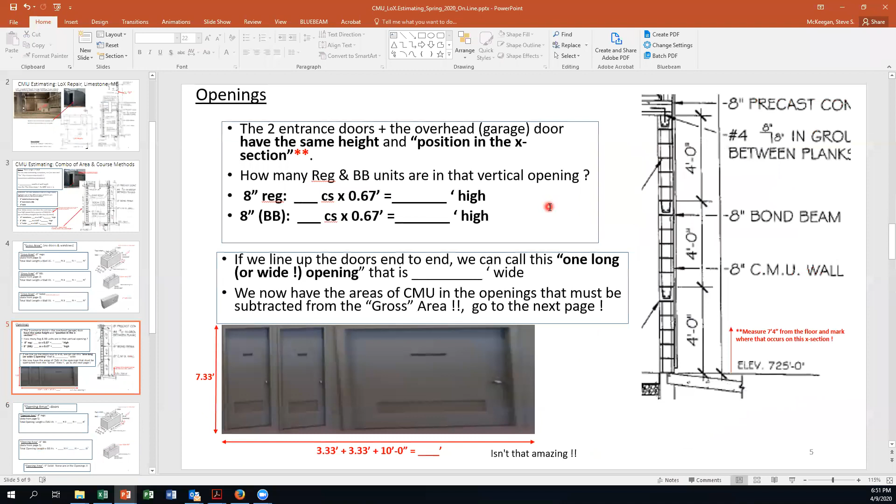And right. And there's a 4-inch solid CMU. Everybody okay on this one? Any questions? Nope.

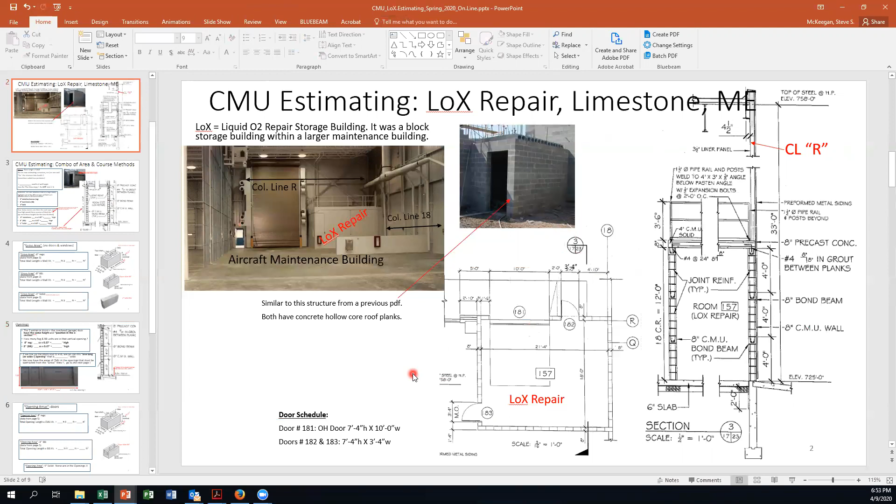Amazing. So we took those doors, 3'4" or 3.33 wide, 10 feet wide. What's that total length, or the total width, as if that were one big door? Okay, that's what you're going to put right there. Now, in other words, I did this part first. So we lined up the doors end to end. We called it one long or wide opening. So this number is this number.

Okay, but we want to say, where does the height of the doors, from the top of the foundation wall, 7'4", where does the top of the door end in this cross section? And you want to use these vertical dimensions. So it's 4 foot from here to here, another 4 foot to here. That's 8 feet total. If I subtract 8 inches, that gives me what? 7'4". So the top of the door is the bottom of this what?

Bond beam. So the bond beam, even though it's an open web bond beam, we're going to make it work. And you'll actually get to play around with these bond beams when you come back and we do the lab part. So the top of the door lines up with the bottom of the bond beam. And so the bond beam is the header. You need horizontal rebar and grout to fill in that void so that it can span over the door opening.

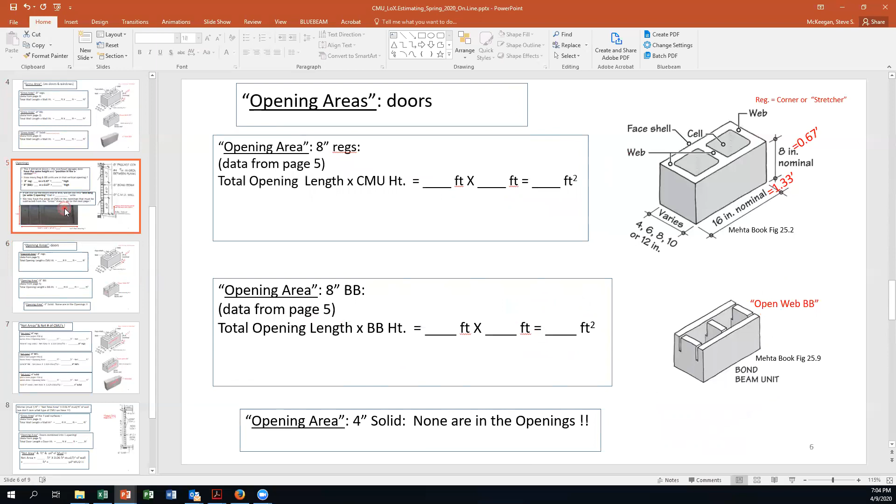If you take the bond beams from page 4, we had the gross area, square footage of wall surface for the bond beams, as if just the bond beams, okay? We subtracted from that number the opening area, the bond beams that were in the doorways, right? There was only one course in the doorway. That's going to give you a net area for the bond beams. Multiply by 1.125. You now have the number of 8-inch bond beams that you need to order.

Net area for the 4-inch solid. Again, data from pages 4 and 6. The gross area of the solid. Now, to be honest with you, the course method would be easier for this one, wouldn't it? It's just one course of 4-inch at the top. And that was another way to do it. I'm going to give you an answer key after this is done, and I'm going to show you both methods. But what we're doing is we're going through the area method for this one. Area method is probably the one that's used the most.

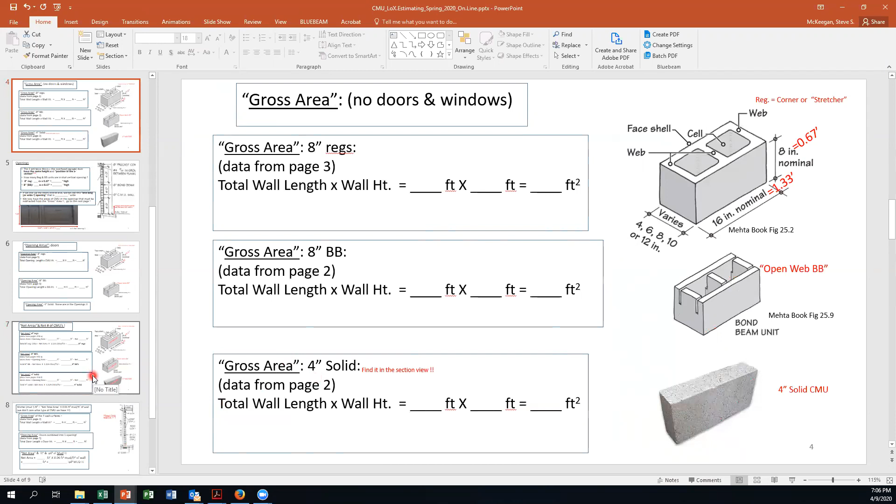There were no 4-inch solids in the opening area.

Whoop, I got some, hey, you guys got to pay attention here. There's somebody waiting. So getting back, where the hell am I here?

It's getting back to here. That was 0. That was from page 6. There's your net area. Multiplied by 1.125 CMU per square foot. That gives you the number of 4-inch solid that you have to buy. So basically, you're going to fill in these blanks.

Oh, no more typing. Only a couple of you did it. I didn't see any collusion, but I did in another course, not your course. And so the rule is you got to do this by hand. You cannot type it. Okay, keeps you honest. Strictly, it's nothing personal. Okay. Is it making a little bit of sense for you? No. What if we're able to like draw on it, like edit the document? No, you got to do everything by hand. You can't type stuff in. Okay, that's just going to be a rule. Do we have to write all this, or can we just write like our formulas? What did I tell you?

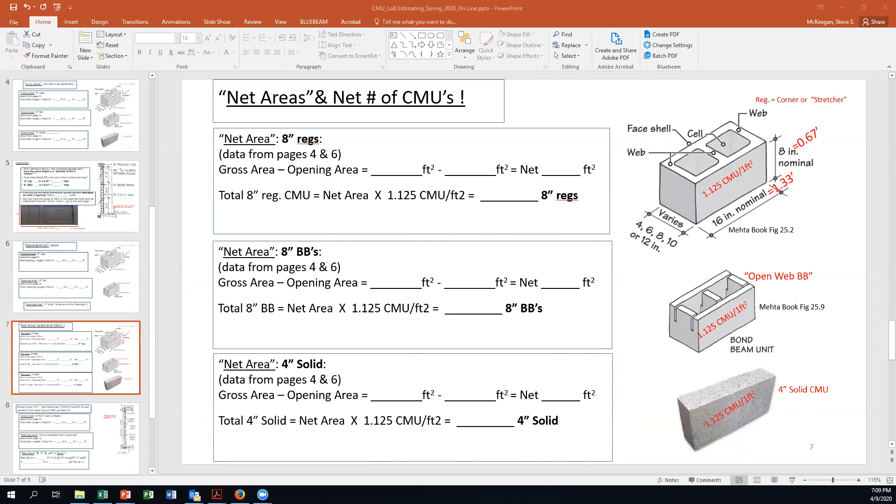So now we're going to calculate for mortar. In other words, there's a ratio, and don't worry about where we got this, but it's 0.06 cubic feet of mud per square foot of wall. And we don't care what type of CMU we have because we're going to get mortar in all of the bed joints and the head joints, okay? So now we got the gross area of the 4 wall surfaces. The total wall length is from page 2, right? No, it's from page 3. That total wall length hasn't changed.

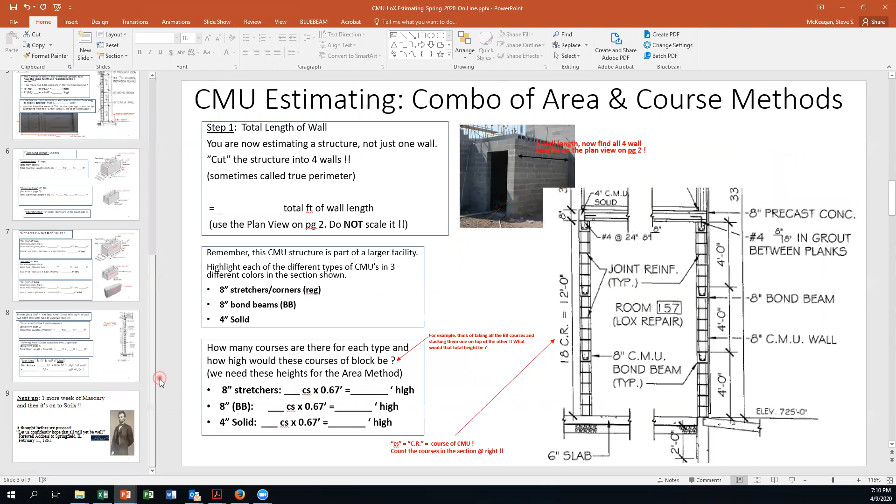So let's go 2 and 3. And so we got the total wall length and the total wall height. Now that includes this 4-inch solid CMU, okay? And that gives us our gross area. The opening area, we combine those doors into one opening. That was the data from page 5, and that's our opening area. We subtract the 2, and that's our net area. You multiply it by 0.06 cubic feet of mortar per square foot of wall, and that's going to give you cubic feet of mortar. And how do you get cubic yards? Divide that by 27. Thank you.

Otherwise, you're gonna hear me cry. Can you still see me? No, I don't think you can, because you're seeing this thing, right? We can see you. Oh, can you? Well, you would have seen the tears. Big old tears coming out of both eyes.

So that's about it. Now, what do you think? We have our next Zoom at about 7:45 to 8 p.m. after our surveying on Monday. So my thought is to make this due Monday night at midnight, 11:59 p.m. So you can ask me any questions Monday night, and then you got about 3 hours to fix it. How's that sound? Sounds good. Is that fair? Does that work in with your other schedules? Okay, we're trying to make this so it works for you.

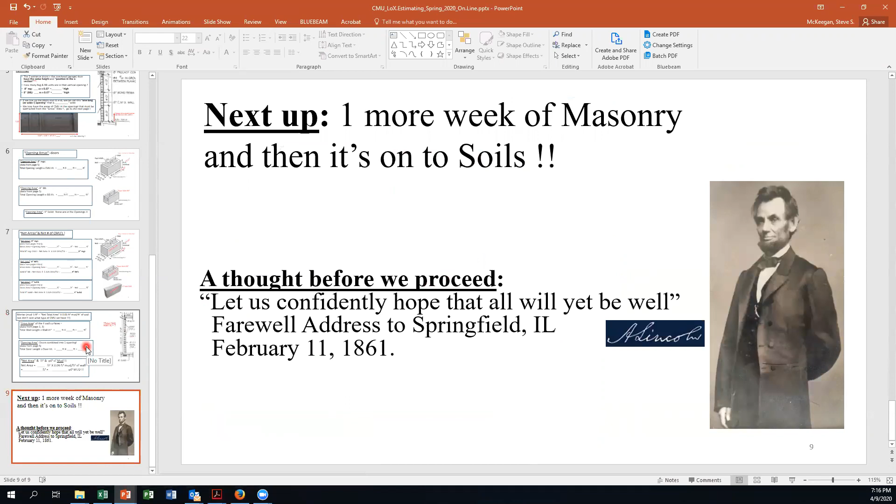Now, next week we're going to do one more week of masonry, then it's on to soils. This one I think is, hopefully, we're walking you through step by step. Help each other out, if you would please. And let's go to CMU specs. Where'd it go? Oh, here we go.

So I put these on there. They look pretty good. It's pretty basic. Specs are, and this is already posted, specs are pretty boring, but man, are they important. I mean, look at the submittals just for block: general information, product data, shop drawings. Typically that would be rebar drawings, if you will. Samples, list of materials for mock-ups. You had to do an 8x8 size mock-up.

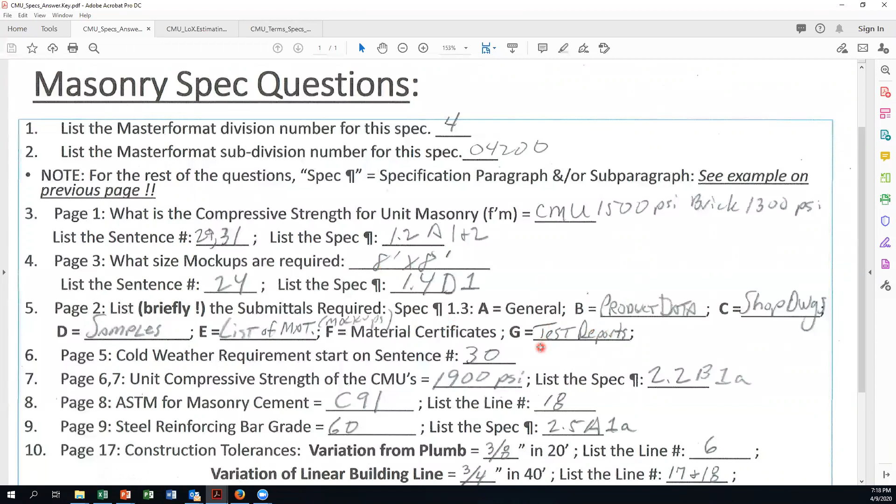Material certificates. That is from the supplier typically. Test reports from a certified lab. I'm working in Albany on Saturday and then in Newburgh for a couple of Saturdays in May, going down there. And these are companies that actually do tests on block, okay?

This is a good one, variation from plumb, right? In 20 vertical feet, it can be out of plumb by 3/8 of an inch. The linear building line: if you took a mason line and you pulled it along maybe one course on Evan Tower, within 40 feet, in plan view, you can be out 3/4 of an inch.

And when we get you back into the lab and we start building these block mock-ups, you'll see just how hard it is to do. This is a biggie, and this is actually where we have the fun in the lab, trying to get as close to tolerance as possible.

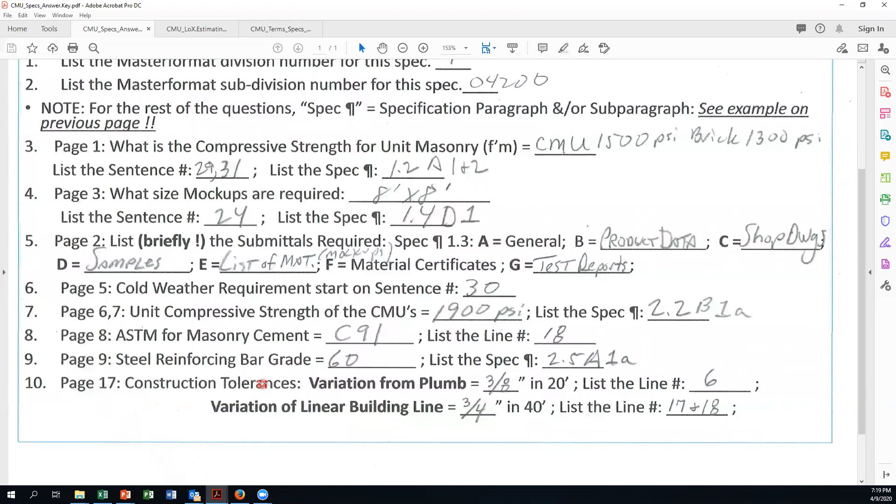Okay. This one talks about the unit masonry. So f'm is the compressive strength. And this is both the block and the mortar. Both the block and the mortar have to be 1500 PSI. The compressive strength of just the block has to be 1900 PSI. So this is the individual block. This is the system of block and mortar, okay?

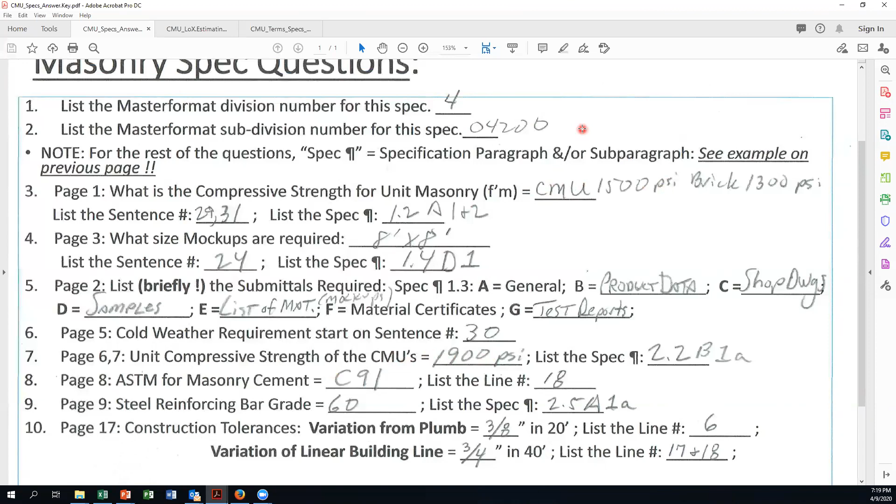So it's a good little introduction to the specs, and the specs are absolutely critical. So that's that.

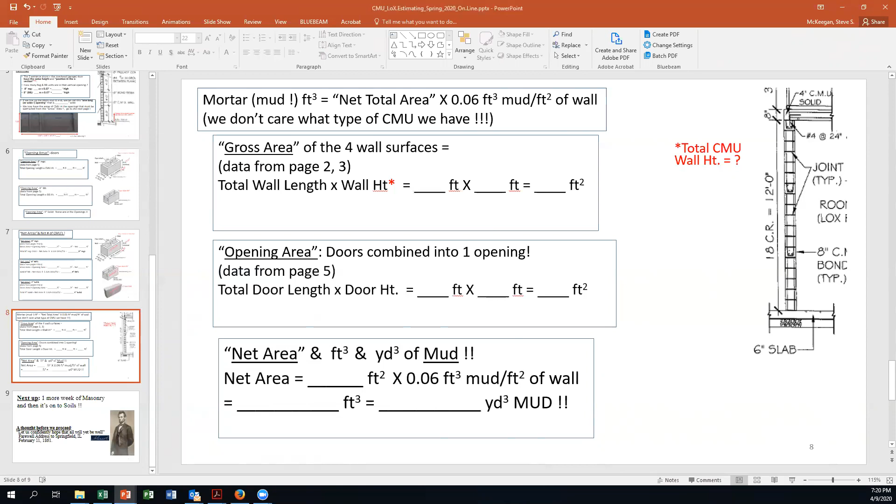What else was I going to do? I think, let me pause.